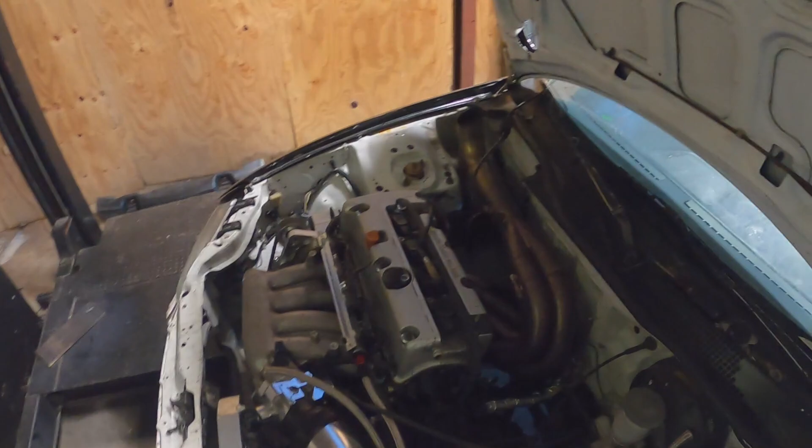We got the damn piece of shit K20 turbo car here on the dyno. We're gonna try to get it knocked out today, make about 197 to 199.9 horsepower. We got the 4-inch intake and a Chinese hood exit. I'm gonna see how much power we lose by going to this header.

So what's your horsepower guesses over here? Low cam or what, final? Yeah, final, not the first hit. 212 - you own the car, you think it's gonna make 212? Damn, most people have higher expectations. I'm not a retard. So 210? 210? 215? Oh my god, 225. Y'all got no faith in this header. I just got no faith in the tuner. I already know somebody you can take it to. There's 3 other tuners in North Carolina I can take it to. You drove 3 hours, actually 5, to come get your hot rod tune.

Are you putting the great value tune on it? Yeah, hell yeah, it's a great value. Base maps for life. You know, sprinkle a little time in here, a little bit of fuel here, it'll be good.

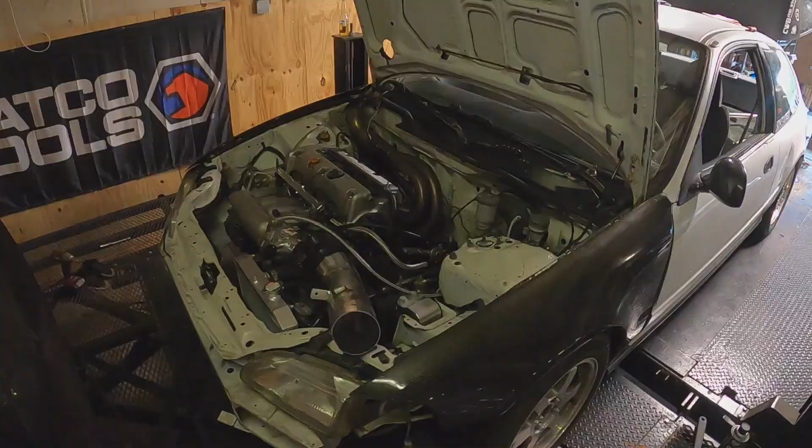But we're gonna go get this thing strapped in and try to make some pulls. All right guys, so last pull it made like 140 on low cam. I'm just doing 0 degree.

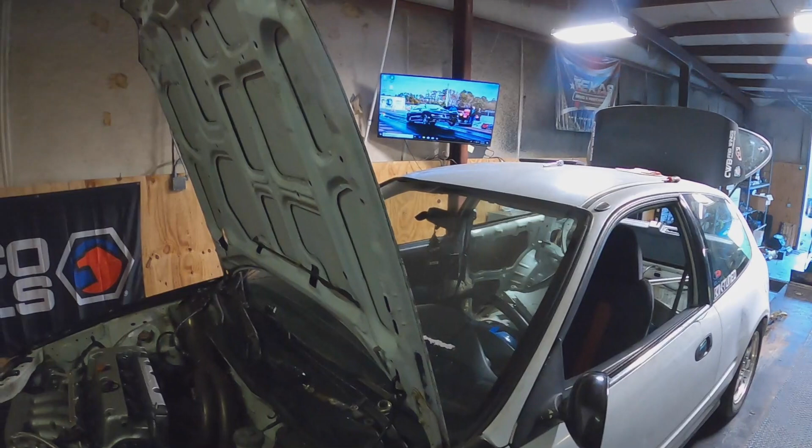Well, I was doing some low cam 0 degree on the VTEC pulls just to figure out what the motor likes. It made like 140 on that pull. I did like 3 hits, and then I pretty much stabbed the gas really hard on the last pull.

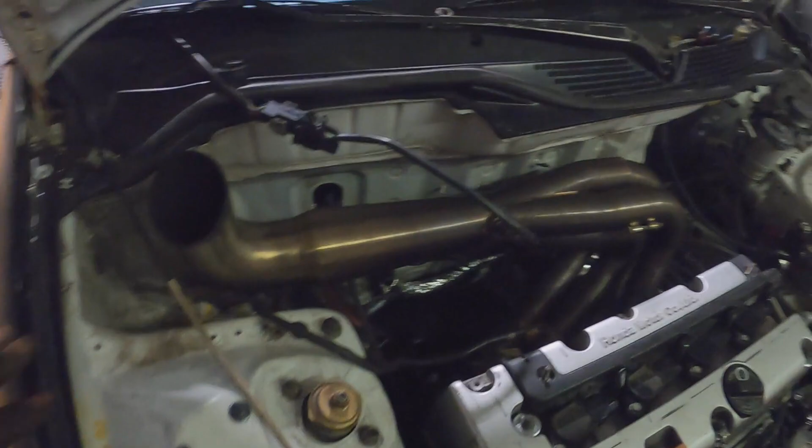And it pulled the axle clean out of this boot over on this side. You can't really see it right now, but once I pull it out you'll be able to see it. But what we're gonna do - I blew the head gasket on the Blueberry being an idiot, and I'm gonna take the traction bar off my car and put it on this car.

Because what it's doing is the wheel is moving so far forward that it yanks the axle out of the cup that's in the boot, well, out of the cup in the axle. So with the traction bar on there it'll solve that problem. So we're gonna do that.

We're gonna take the axle out of my car and put it in here also, and then get back to tuning. So tomorrow morning I'm gonna go yank those out of the Blueberry, come back, install them on this, and then get the tuning on it and get it all ironed out.

All right guys, so got the new axle and the traction bar in the car, and we're gonna set the car back up on the dyno and start making some hits.

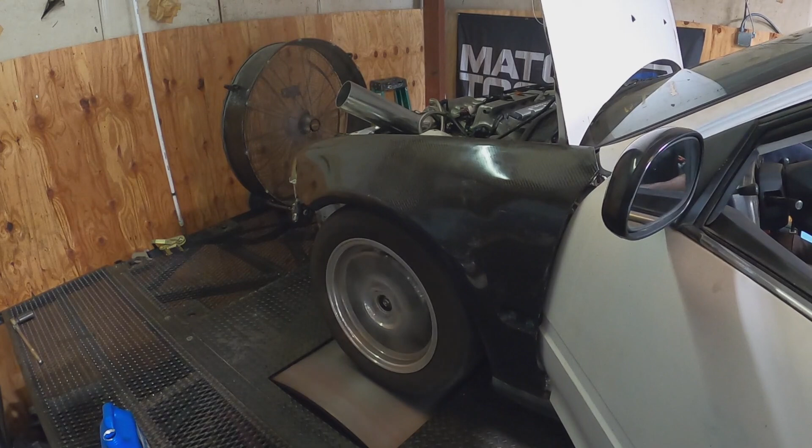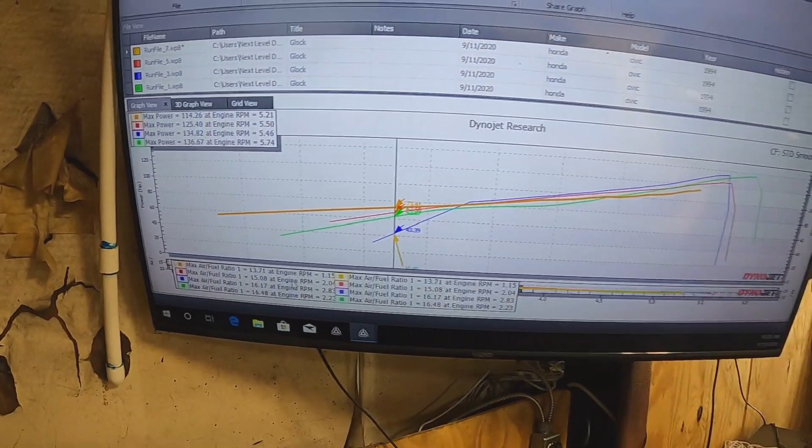Alright guys, so we ended up with like 136 on low cam. We lost about 4 horsepower. We are at like 60% duty cycle on the injector. These numbers right here represent the cam angle.

So I did from 0 degrees to 40 degrees, and normally on 40 degrees you lose a lot of top end power, but you gain a shit ton of low end power.

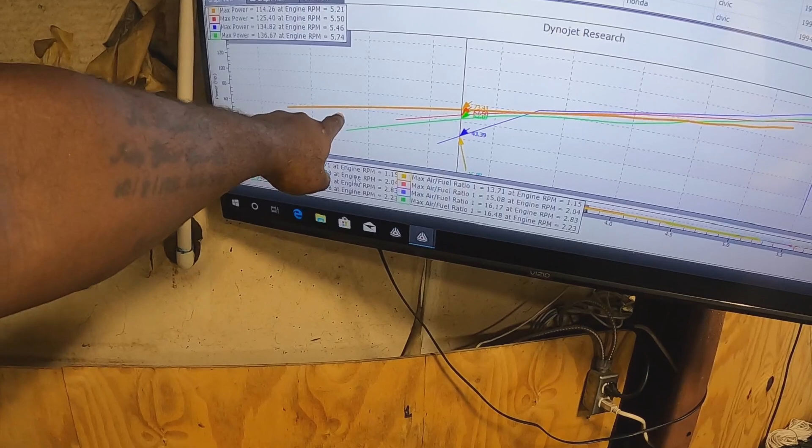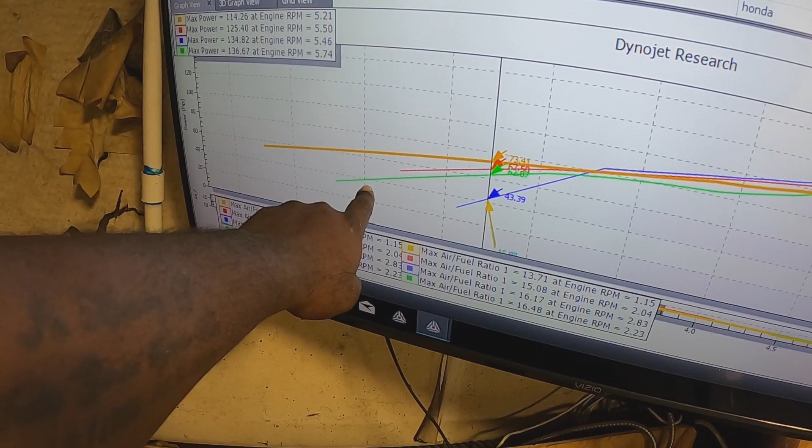So if you look, the orange line is 40 degrees, and then the green line is - I started to pull late on this one - the blue line is 10 degrees, but 0 degrees is the green line right here.

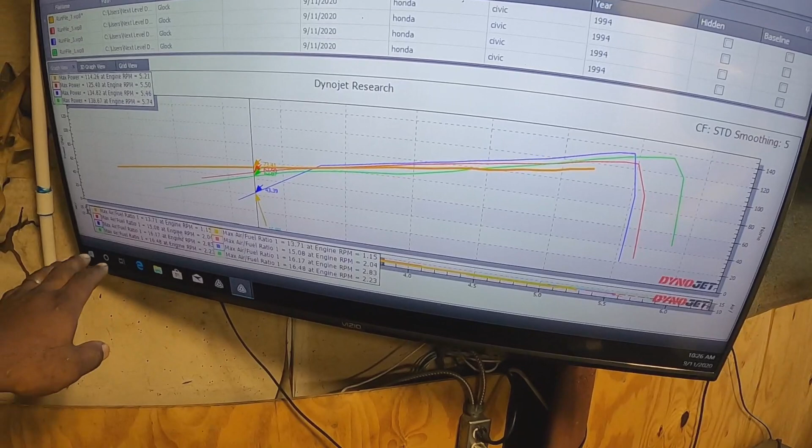So what you want to do is go into your ECU and blend the VTC tables, which is what I'm about to do. So you want to start with around 45 and try to end in the lower numbers.

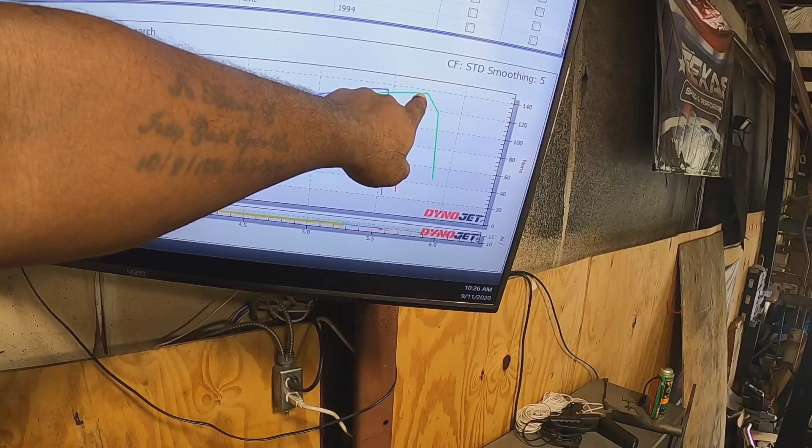I guess this one would end in like the 10s, like 15, something like that, or it might end in the zeros, because I didn't really pull it all the way out. So we're just gonna play with the lower end numbers, but as far as mid-range, I already know where I need to be.

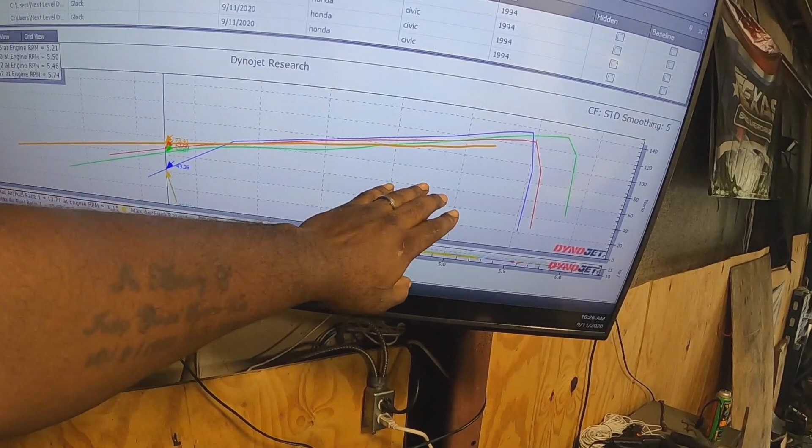So what I'm gonna do now is put some numbers in the ECU that I think will work in a VTC table, and then let the car cool down and make another pull.

I made about 7 pulls on low cam. Most of them were just getting the fuel right, but it was really like 2 pulls per degree, 10 degrees of VTC.

Basically this motor has a self-degreeing cam in it that you control with oil pressure and a solenoid, and the ECU - you can manipulate the ECU to command what degree of cam angle you want in on the motor.

So these motors can go up to 50 degrees of the VTC - variable, no, valve timing control, some shit like that, I can't remember - but basically you can degree the cam in the motor. If you're familiar with LS's and the VVT DOD motors, it's the same concept.

These motors do the same thing, but the heads flow so efficient that they make a ton of power on the motor. If you compare a 220 horsepower car that weighs about 2100 to 2400 pounds, it's like a mid 11-second car in Honda world.

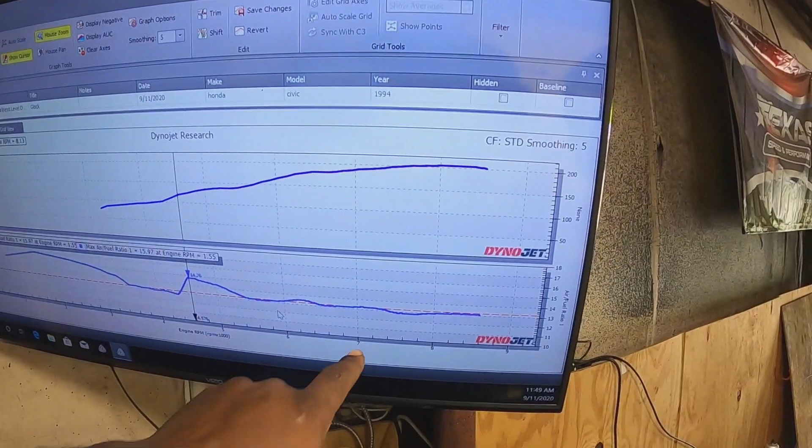Alright guys, I forgot to film the last pull, trying to deal with the VTC table and stuff like that, but it made 204. I read it all the way out, but it got rich at the end, and I still had to clean up this VTEC spot right here. I had a hard time trying to figure out where it was crossing over in the map, but I figured it out.

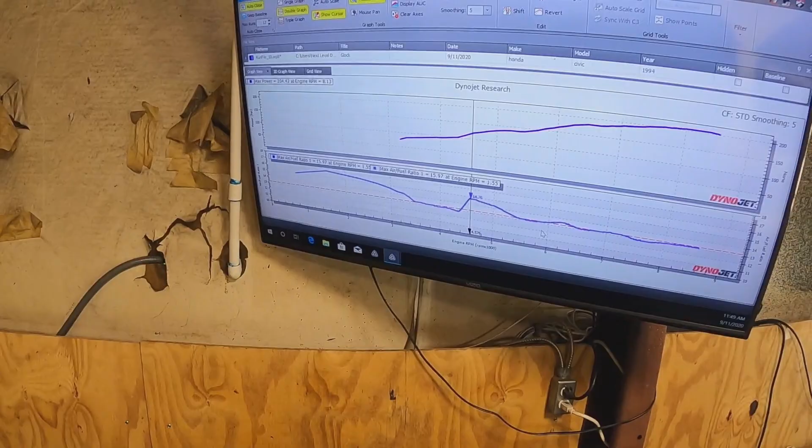Another issue we're having is it's running out of fuel. I looked at the log, and after about 7,000 RPM the duty cycle just jumps through the roof. It's like 12.9 right here, and I'm targeting like 13.1. I'm gonna see if I can pull some fuel out of it and manipulate the map to manipulate the duty cycle, so to say.

But he's definitely gonna need injectors. I knew he was gonna need injectors when we were on low cam, and it was peaking like 60 percent duty cycle, not 60 psi. The only other thing I have not done is manipulate the fuel pressure, which I believe the base right now is at like 60. So he probably already needed fuel injectors from the get.

I'm gonna make one last pull on it on high cam and see what it makes, and then I'm gonna see what he wants to do about injectors. Last hit — sorry the dyno pulls were so short, but it's all I can do with what I'm working with.

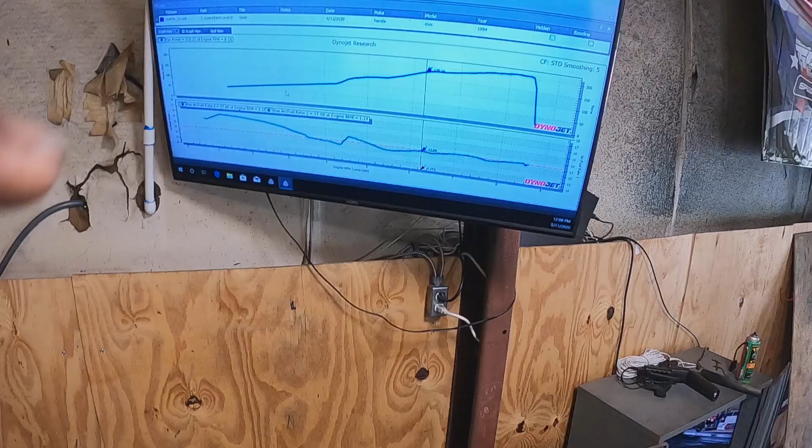That pull made 210. Still chopping away on the VTEC crossover part, but all in all the fuel is pretty much cleaning up. Not really messing with timing, I'm keeping it low, like 26 degrees, because since we are running out of fuel, I'd rather have it on the rich side to keep the cylinder cool so we don't drop a valve in the motor.

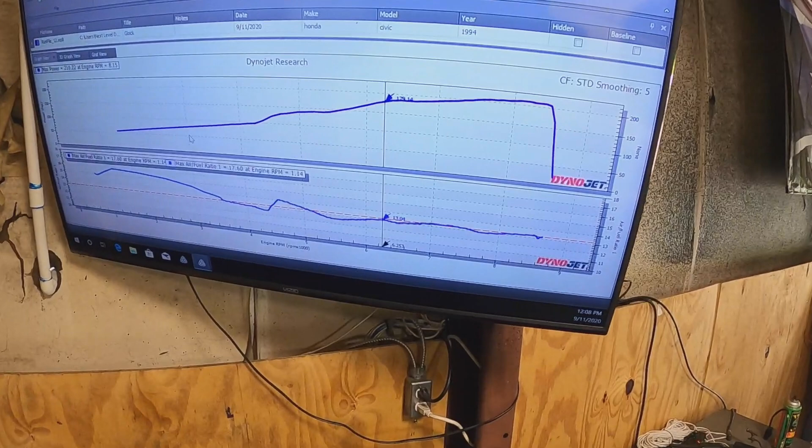So I'm gonna let it cool off to like 120, and then do a pull with the ECT at like 140 degrees, just to make sure everything is good. Then I pretty much just wrap it up, do a couple two-step adjustments, and that'll be it.

He will need injectors. I'll probably turn the redline from 8600 down to probably like 8200, because it doesn't really start running out of fuel now until about 7800. So I'm just gonna let him know, hey man, don't be out here trying to rape ape this thing, because it's not on kill, but the injectors are on kill right now. Let it cool down, give it about 20-30 minute cool down, then come back, do one more pull, set two-step, and finish tuning this thing.

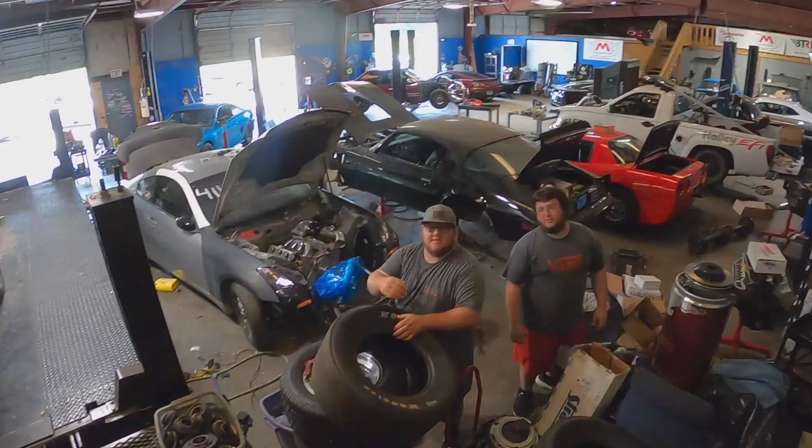We got Rakishi 1 and Rakishi 2 here. I got a neck — yeah, no you don't. Yeah, I do — no you don't. Where's that, long neck? No. Got his long neck here. So these guys brought me this damn headlamp.

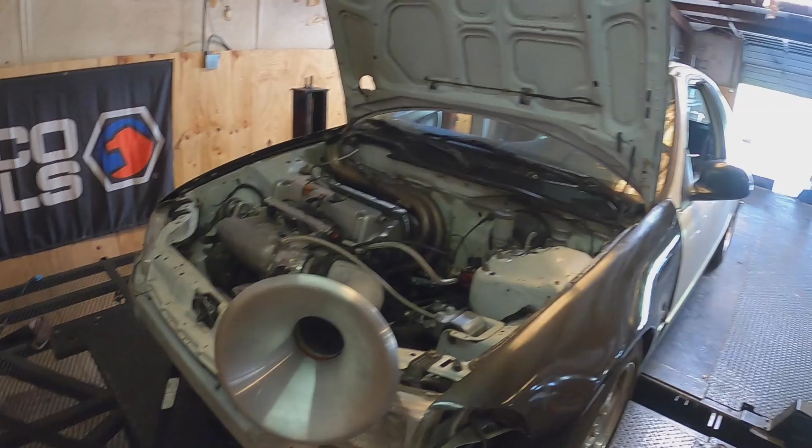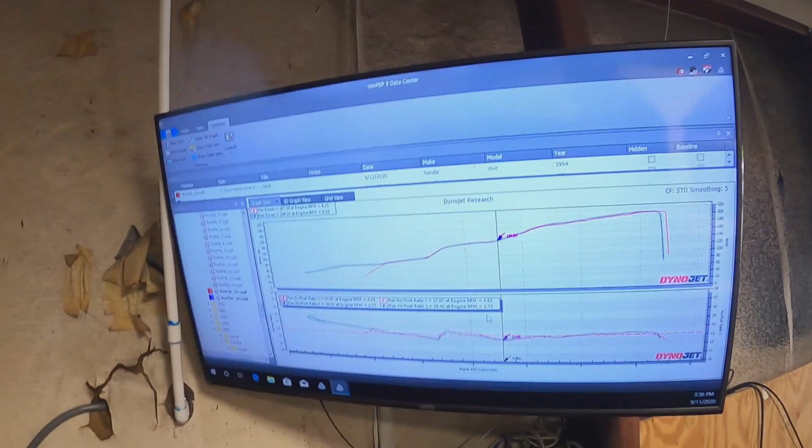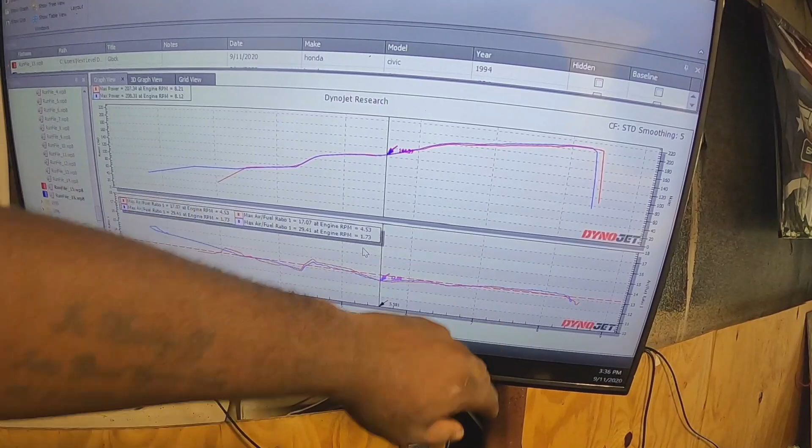Guys, so final number is like 207. It made 210 before, but it rained, it got super hot and humid. So I cleaned up the VTEC spot — it still got a little rich out of the VTEC, I cleaned that up in the tune also, and it should be good to go.

So don't go to the damn Charlotte car meets and get gapped. I don't go to Charlotte. Did you almost just die? You don't know how to judge the distance. The man has zero depth perception.

Big body, but anyway, we're about to unstrap this thing. I'm gonna make him do a little test hit right here in front of the shop. Hopefully it doesn't hit anything. Oh, excuse me — oh, you want me to do it? You gonna — there's no power for a second, but as always...